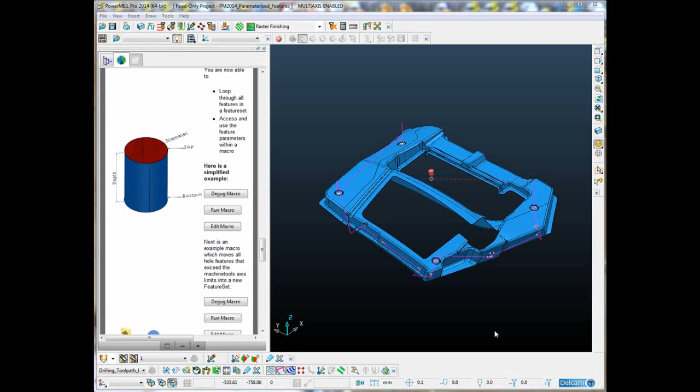The features inside a feature set are now fully parameterized. This enables us to access those parameters within a macro and to use them as we'd like. Let me start by showing you a very simple example. On the screen I've got a model with some hole features.

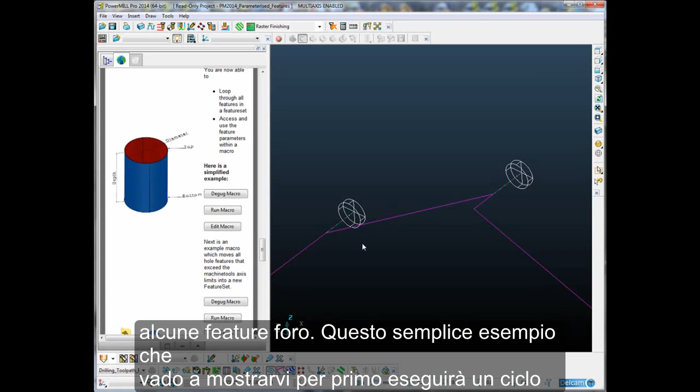The simple example I'm going to show you first is simply going to loop through each one of those features within the feature set and analyze the diameter, the depth, the top, the draft angle, etc. It's then going to pop up a message to the user informing us of those values. Let's just take a quick look at the macro. If I just edit that macro.

So the first thing we're going to do is just to create a new variable, a string variable with nothing in it. It's going to eventually contain the message that we print out to the user, but we're going to build this message throughout this loop. So this is the start of a loop where we loop through each feature within the feature set. That's exactly what this will do. $f is simply my own variable name.

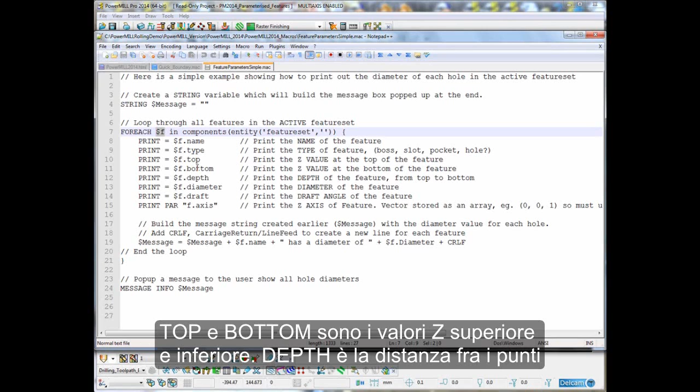Now the feature has got a number of subparameters. This is .name, which is the name of the feature. .type tells us if it's a boss, a slot, a pocket or a hole. The top and bottom are the Z values of the top and bottom. The depth is the distance from the top to the bottom. The diameter is obvious, and the draft is the draft angle. We also have the axis.

Now you'll notice I'm using print par rather than print equals for the axis, and that is because the axis is stored as a vector, which is what we call an array. Basically it's multiple numerical values, so it must be stored in an array, and we can't use print equals to print out the contents of an array. We must use the print par command.

So it will print out the name, the type, top, bottom, depth, diameter, draft, and the axis for each and every parameter. What it's also doing is it's building this message string which we created at the top. It's adding to the same message every time, and it's adding the name of the feature, then a text string "has a diameter of", and then whatever its diameter is.

And then we have a CRLF, which means carriage return line feed, so it adds a new line at the end, because this loop is going to go back, do the same for the second feature, add to the message, add a new line, go back, print out the values and add to the message for the third feature. Then after the end of the loop, which is this closed curly bracket here, it will pop up a message using the message info function $message.

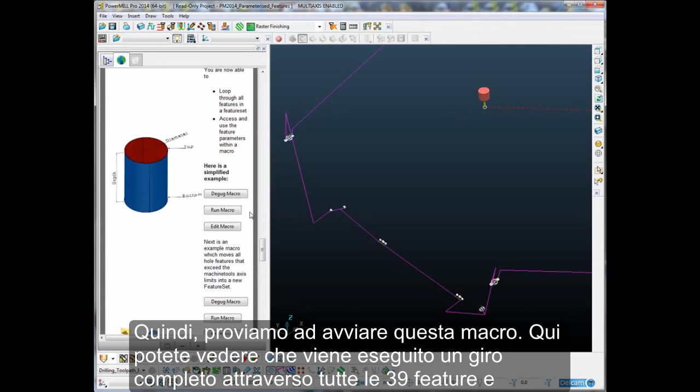So let's try running that macro. And there you can see it's looped through all 39 features, and it's told us the diameter of each and every one of them. So let's look at a more practical macro. So this is a little bit more realistic.

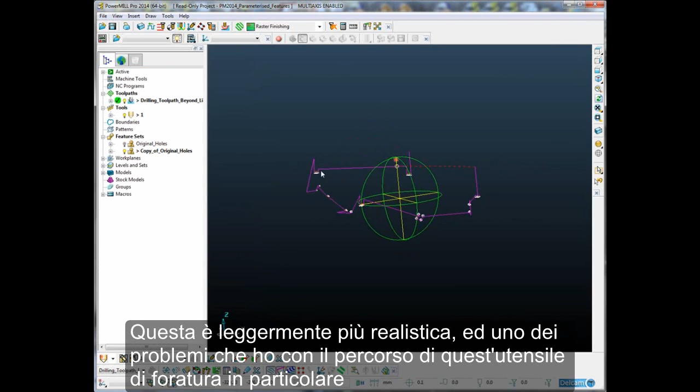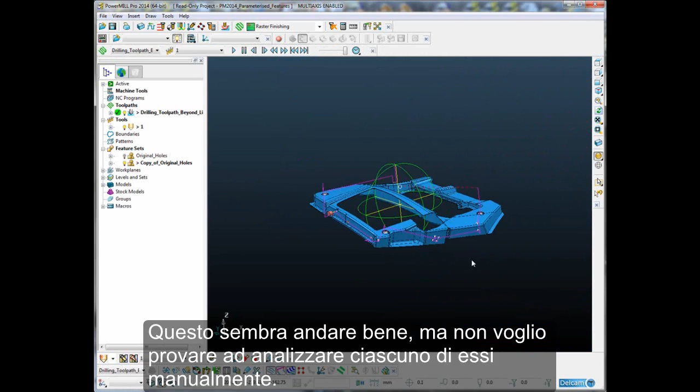Now one of the problems I have with this particular drilling toolpath is that some of the holes go beyond the tool axis limits. Now I'm not sure how many, and sometimes these toolpaths have a great deal of holes in them, and I obviously can't machine it if it's beyond the tool axis limits. So this one looks okay, but I don't want to have to go and analyze each and every one of them. So what I've got is a macro which analyzes the tool axis.

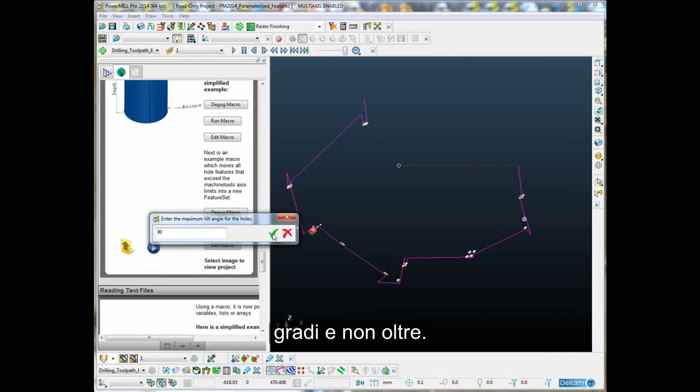It will ask me what the maximum limit is, so if I just run that macro, it asks me what is the maximum tilt angle for the machine tool. Now I'm going to say my machine tool can tilt to 90 degrees and no more. It's going to analyze every hole, and it's told me that 6 features were out of limit and they have been placed into a new feature set which is a copy of the original.

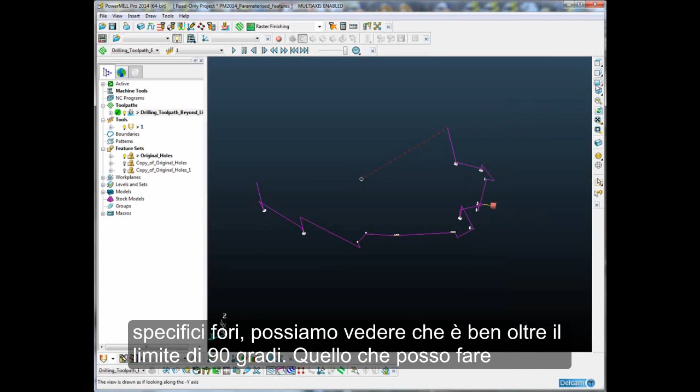So let me just switch off that toolpath for a second. It's actually removed all of the holes which were out of limits, and it's put them on a new feature set. Here they all are, these 6 holes. Now if I look at the original toolpath and I just attach the tool to one of those particular holes, we can see that it is well beyond the 90-degree limit.

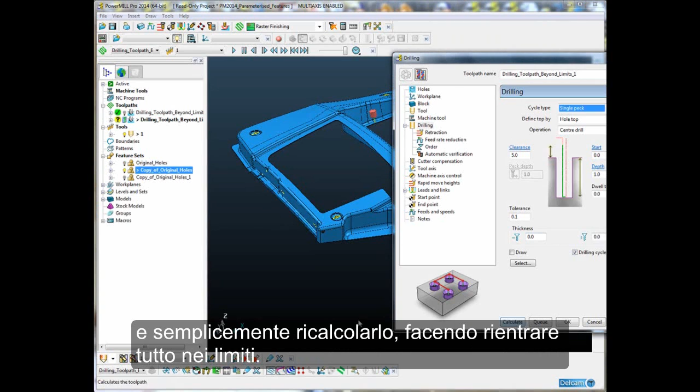So what I can do now is recalculate this particular toolpath using, not the original feature, the new feature set which the macro created, and just recalculate that, and now everything will be within limits.

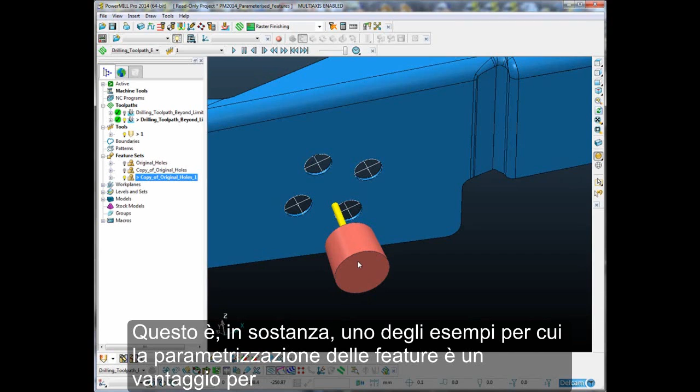Now unfortunately I still have 6 holes which I have not machined, but it's simply impossible to machine these 6 from this setup, but because they're in a new feature set, here they are, I could machine them from a different setup. So that basically is just one example of why the parameterization of features is a great thing for the macro writer.